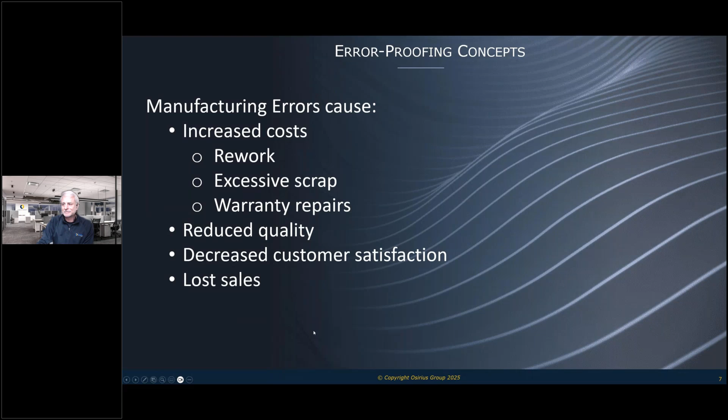So there's really two primary methods to address errors. One is to be preemptively planning and avoiding making errors in the first place. That's going to be based on prior experiences. So you have to know what was done before and why, what caused errors in the past. And it always boils down to gathering data and analyzing that data to understand where that points you to as far as the root cause of those problems.

And then similarly, retroactively identifying errors and determining root causes is the alternative to having done it ahead of time. Observation of the process in action is very important for the people helping to resolve those issues. And again, gathering data, analyzing that data, understanding what it's telling you as far as where deviations might be happening, where steps might be out of order, all those things can be causing your problems.

And then specifically on data analysis, you've got to have that data gathered. There's many different ways to gather that information. There's manual methods and automated methods. And automated methods are those that help you to automatically record information and track it. And one of the things that we'll talk a little bit about as well is traceability, being able to start with a component and follow it through the process and understand what happens to it in each step along the way, and documenting the changes and where deviations might be happening.

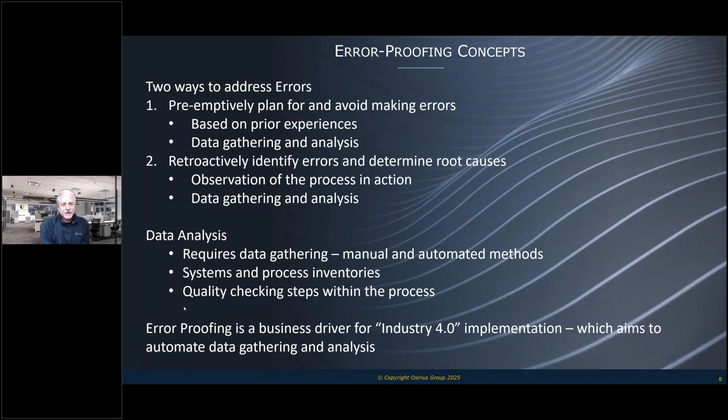And I just want to close this particular slide with: error proofing is a business driver for what a lot of people might be calling Industry 4.0, which is the digitization and use of automation and technology to address a lot of the issues. It also helps in automation in data gathering and some of the analysis, leading all the way up to more current developments like the applications of AI. So let's talk a little bit more about that.

So Industry 4.0 is kind of the digital manufacturing process. It is a business driver that leads people to invest in new technologies to help them improve their processes by automating things that are repetitive, that maybe have been manual, and helping to track and gather information all throughout the process so that they can help to identify where problems might be occurring.

And in a lot of ways, it's a cultural transformation. Some people do resist change, because they're invested in the current process. But it is important to understand that the culture has to change in order to get into the future tools and automation that help you, for your business bottom line.

So this chart I know is very, very busy, but it's representative of an example of some of the different areas involved with Industry 4.0, as well as the different kinds of tools that are applied in different steps along the way.

So if you look across that first row, the process flow is product engineering, manufacturing, purchasing, etc. So that's kind of the steps along the life cycle. And then the AI learning is something that can be applied to learning common parts and equipment under product engineering, predictive and preventative maintenance in manufacturing, purchasing contracts and some of the repetitive tasks under the procurement phase, financial. There's ways that the applications can be applied throughout.

And in the bottom row there are different vendors and tools that can be applied to help along the way. And these are not endorsements of any kind. It's just representative samples of those kinds of tools.

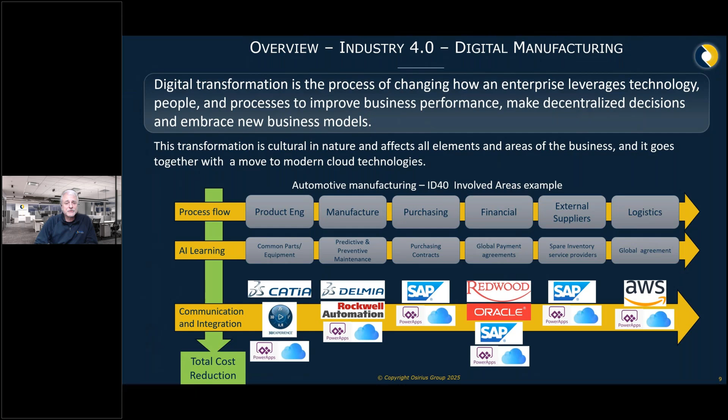Now, one of the things that is important to emphasize is that Industry 4.0 is not a specific destination. It is not a single place or space in time. It is a process, and it is a spectrum. There's many different things you can do to apply these solutions to improve the errors in your processes without having to do everything that's possible, right? If you do, you can certainly overspend and throw technology solutions at problems that maybe don't need all of those bells and whistles in order to address the real root causes of the problem.

So one of the things I just clearly want to make you understand is it is a spectrum, and maybe you need to be at kind of the one end of the spectrum and not all the way at the other end with all of the things that could be applied. So we see digitization all over the place. There's things changing every day, every week. New technologies are available, and the possibilities are endless. So what we like to emphasize with our customers is to right size the solution to their issues and needs.

There's many different constraints to consider. You've got the budgetary constraints, you've got technology constraints, you've got time constraints that maybe there's only certain windows of time where they can apply changes to the manufacturing floor. All of those things have to be considered. But first and foremost, we start with data collection. Without data collection, you really don't know where you're starting from. So you need to know where you're starting from, what data you've got, and where it helps you point to the issues that need to be addressed.

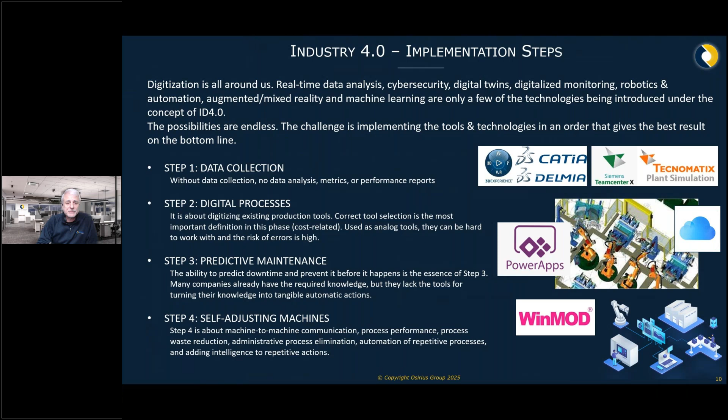And then going on to the next level above that is self-adjusting machines, using perhaps AI technologies to do that kind of analysis that I just mentioned, understanding those trends, understanding those triggers that can lead to larger problems and variances that are getting too much to be adjusted for and accounted for within the quality standards. So again, examples off to the right hand side, not an endorsement, just the kinds of representative tools that can be applied in these areas.

It could be available just about anywhere, with the smartphones and everything that you have. You can access these things wherever you are in whatever format you need to digest them and understand them, and have that information accessible to anyone who needs it as well. So whether it's the CEO that needs to see certain executive level reports, or the supervisors and managers on the floor that need to be able to understand what's in their scope, those can all be tailored to different audiences as well. So giving that visibility is very important to make use of all of that data that we've been gathering and analyzing.

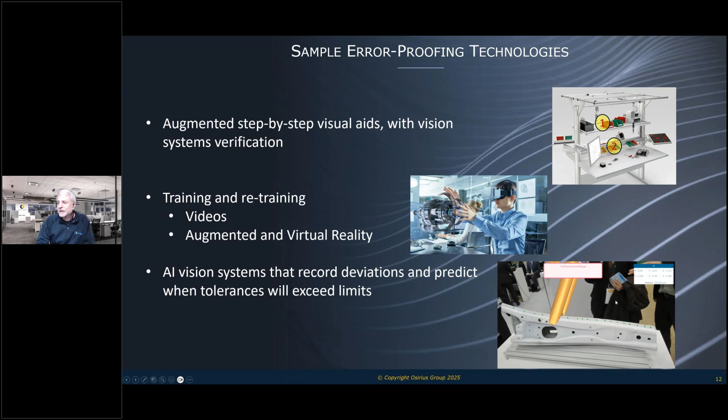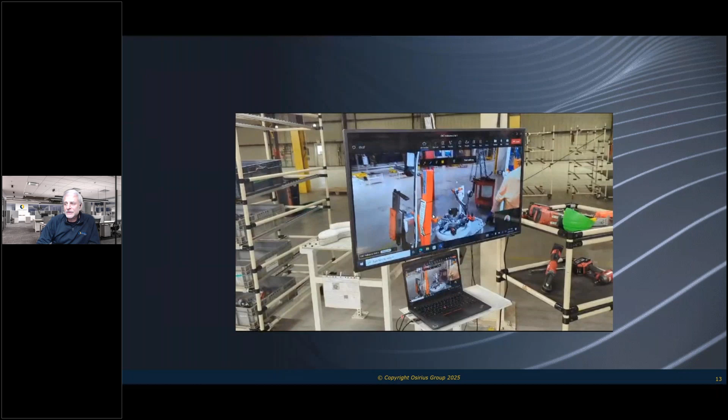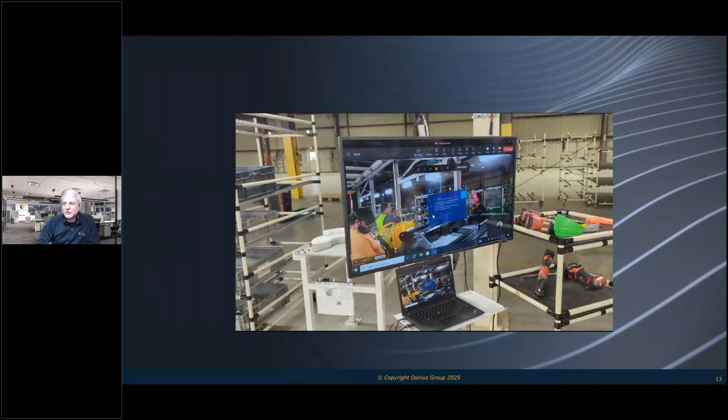And then the blue boxes that show up on the screen are also giving additional information on what you need to do and what are the tools that you need. So again, these are reinforcements to help people to learn and understand how to do the processes that they need to get done in order to do the job correctly. All right.

So just some quick notes of experience that I wanted to highlight before we get into the specific details of a few projects. Analysis of plant operations to improve efficiency and quality, which resulted in reduced costs. So that's one of the things that we've done, is to come in and help solve the problems. We've got a problem on the plant floor. We've got some things happening. We're not reaching the targets we're supposed to reach as far as time and quality.

And we go in and we observe and follow the steps that I showed earlier of how to gather data and come to conclusions on what is needed to address the issues. We have extensive knowledge and application of best practices to help bring creative new ideas to customers, and we have that multi-customer, across the globe experience that helps us to say, hey, we've seen other people do X, Y, Z, and we think that would be very suitable for you to do some things similar to that.

But to help bring new creative ideas and challenge the status quo. One of the quotes that we like to use from Einstein is you can't use the thinking that was used to create the problem in order to solve the problem. So it helps to have some people to give you an outside opinion and point you to some things that maybe aren't so obvious to the people that are experiencing it day in and day out.

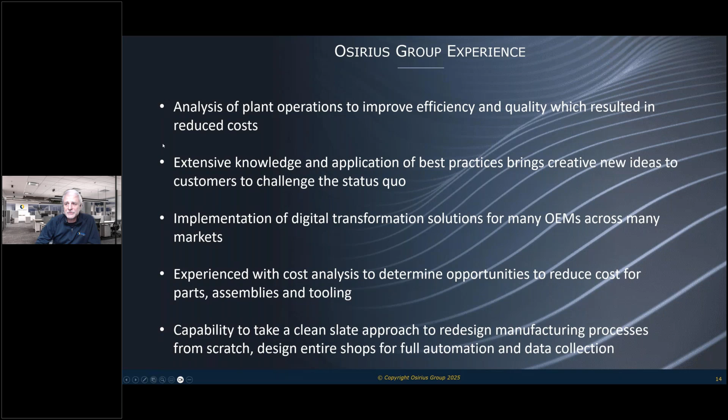And that's that proactive solution that I mentioned earlier, using the knowledge and experience that people have in order to avoid problems to begin with, as opposed to doing it the way it was always done and solving problems later. So just some quick highlights before we get into some specific examples.

So with that, I'll ask my colleague Diego Raviolo to do a brief introduction of yourself, and then we can talk a little bit about some of the projects that we have here. So Diego. Sure, no problem. I hope that you can hear me okay.

I will go very quickly through some examples. This is a system that was put in place in South America, in Brazil. Actually, the initial information was from France, and the Renault company was responsible for this contract. They provided to us a digital solution to produce the hemmings on the external panels for a model that was manufactured at the time in Europe and was moved to South America, to Brazil. We made a discrete event simulation. We updated process, floor space requirements, and volume.

And using the simulation, we were able to reduce the initial process from 11 robots to 4. So you can imagine the cost reduction in implementation allowed us to go further with the available budget, and we incorporated things from Industry 4.0, like automatic calling for maintenance and automatic self-validation of the robot hemmers. We incorporated self-testing of the rollers.

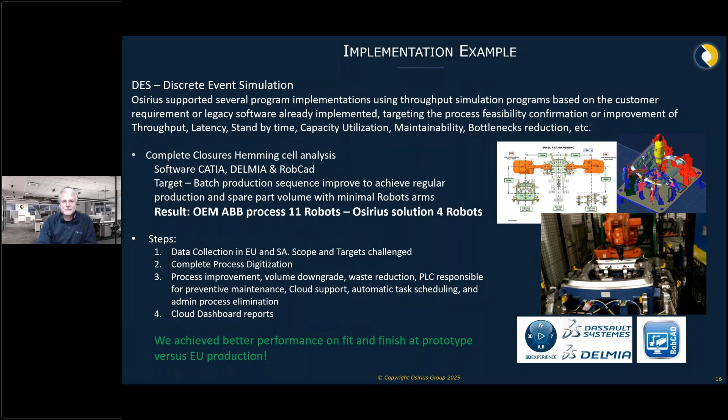The only quality issue that we had on the initial prototypes, you reminded me, thank you, Rob, was what we call explosion of the sealer on the hemming areas, because it was manually applied, not by the robot, for the prototypes, and was overfed into the system. So the only quality issue was the extra sealing that we put on the prototype parts. Yeah. Okay.

This was an example of a vision system that was successfully implemented in Mexico. The plant was in a very bad situation in terms of direct run at that time. We made an assessment of the plant. We recommended several actions. We categorized these actions into the categories that you can see there, from A to F. The ones that were related to equipment were handled later by us, implementing an improvement on the booth.

The downdraft of the booth was actually not so good, and we put in an automatic system to track that, calling for maintenance in case filter changes were required, or if any metrics from the booth changed quality, it would automatically call maintenance.

The additional equipment was a vision system to analyze the reflection quality on the paint surface. And with that, in a few months, we were able to improve direct run from 23% to 85%. That was the target of the initial project. Currently, they're running a better quality because there were additional actions that were incorporated in the system later by the customer directly.

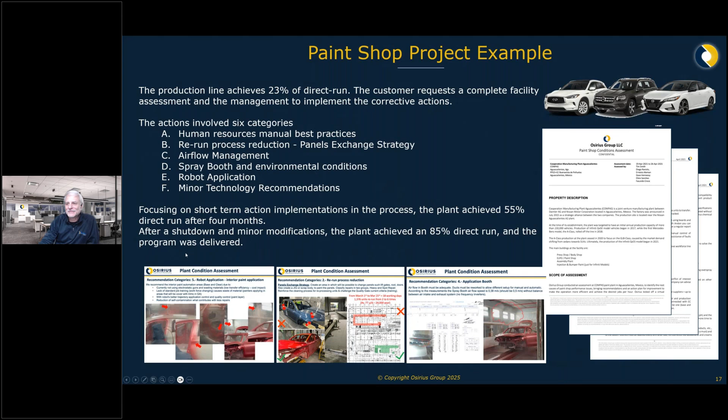All right, why don't you go ahead and talk through this one? This project was a very challenging project from the data gathering at the beginning. It was initially a 1.5 year project that, due to the results, was extended another 6 months, another 6 months, another 6 months. We finally ended this project incorporating almost an additional 2.5 years of other improvements because the initial phase 1 was really well received by the customer.

The project involved us all around Europe, moving a complete platform they call B9, a light commercial vehicle platform from the company Stellantis at the time, from Europe to Russia. The company that you can see there is PSMA Rus, located in Kaluga, nearby Moscow. The tooling that we transferred was moved in 400 trucks, covering all regions that you can see in Europe. And the total weight transferred was a little more than 10,000 tons of tooling.

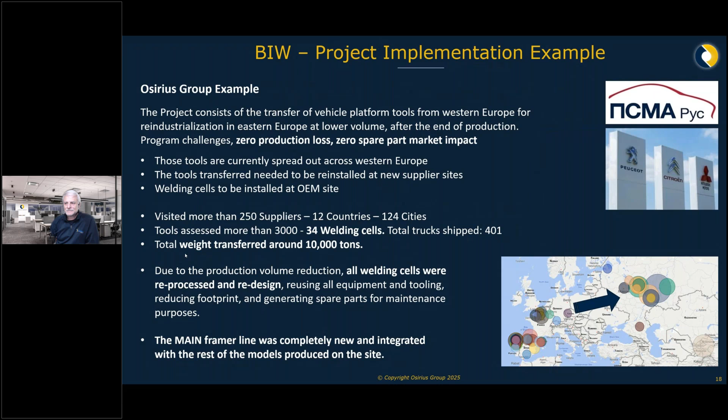And you can imagine that moving this amount of tooling required a lot of data gathering initially to understand from where to where, the tooling's conditions, the administrative conditions, who was the owner, if it was fully paid, if it belonged to the customer or to the suppliers, what is around the assembly lines nearby the tooling. It was a very large detailed program. We were able to complete it successfully 21 days before the war started. So that was very good timing to finish a project.

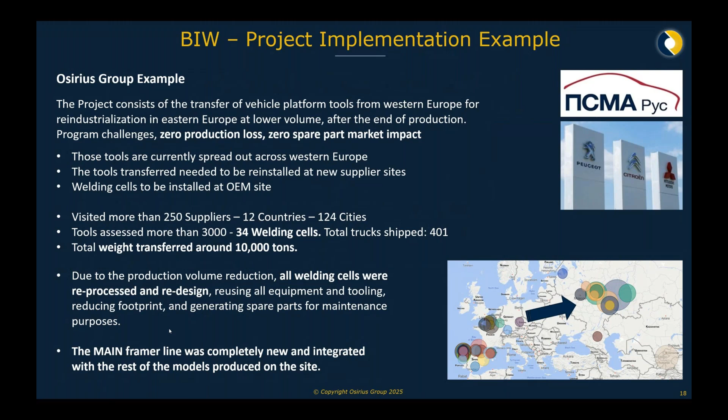And just want to emphasize, 250 different suppliers, 12 countries, 124 different cities, 3,000 tools assessed, 34 welding cells. The key takeaway from this is data management and managing all the information of all these different tools. And that kind of leads into the next slide here that talks about the dashboards that I mentioned earlier, tracking this information and having it available. And bottom line is traceability, being able to trace how it got to where it is, all the way back to where it came from.

Diego, you want to? One more comment, Rob. The platform that was transferred to Russia was running production in some cases for more than 12 years in Europe. You can imagine at that production volume how many vehicles you can find on the streets. Spare parts availability was the driver for this project, not production, honestly. So we needed to keep feeding the distribution centers with parts during the transfer. So it's not only production transfer, it was also spare part stock, production buffering, and transfer with a really limited time to be able to restart production without affecting spare part availability in Europe.

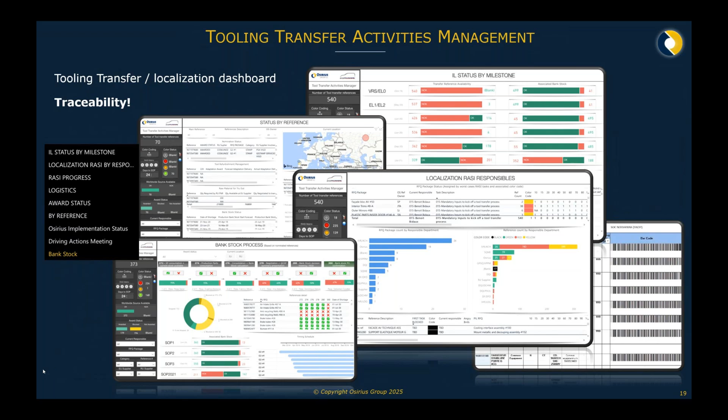And here's some other screens, again, from that same work that I talked about. Actually, these might be from another project as well. But again, the same idea of tracking information, having it visible, and being able to look at and understand the status for the customers, and the management leaders that need to see information and understand what the status of things are at any given time.

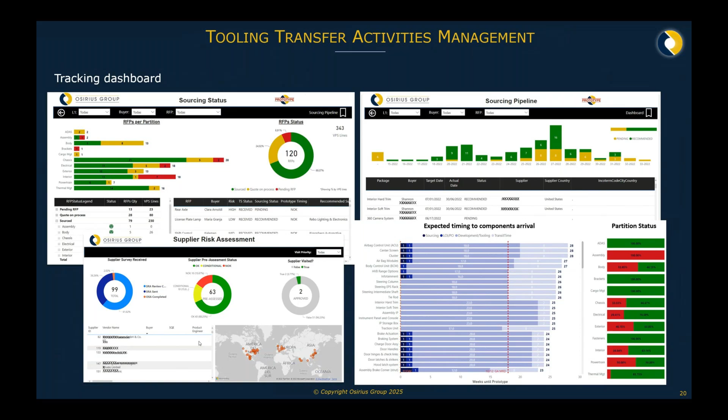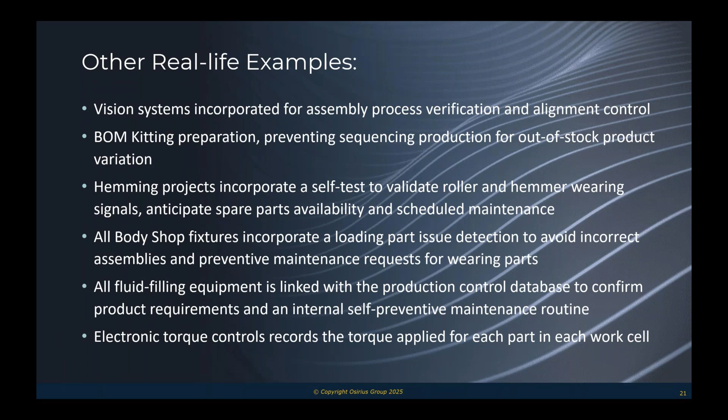And as I think most people know, these electronic torque controls with DC tools are incorporated into the AI systems and vision systems to not only record the torque, but control that all the torques are correctly applied, that we are not torquing the same screw 3 times, and these kinds of things are other examples of error proofing that can be incorporated in the working cells. That's it, Rob.

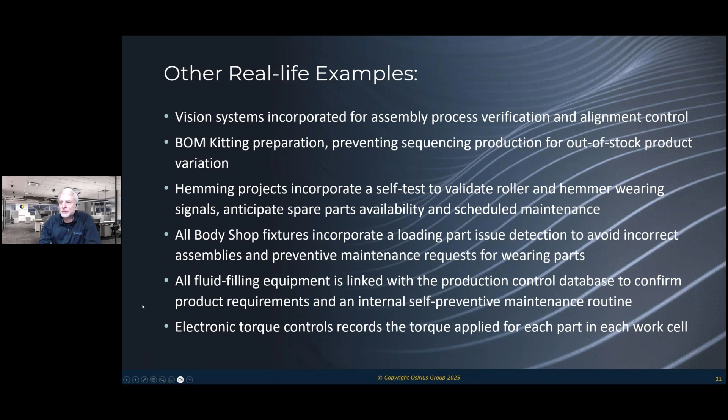That's great. Thanks so much for adding some extra color to those. So with that, that's the end of the prepared material that we have. We can go into Q&A, and we'd be happy to address any questions that might be out there.

Thank you, Rob and Diego, for a great presentation. It's very clear. One size does not fit all. You shared a lot of great examples of what you've done with clients. But obviously data in digital dashboards, data is really important, how you gather it, why you gather it. And it's evident that your team and your solutions are right for the industry.